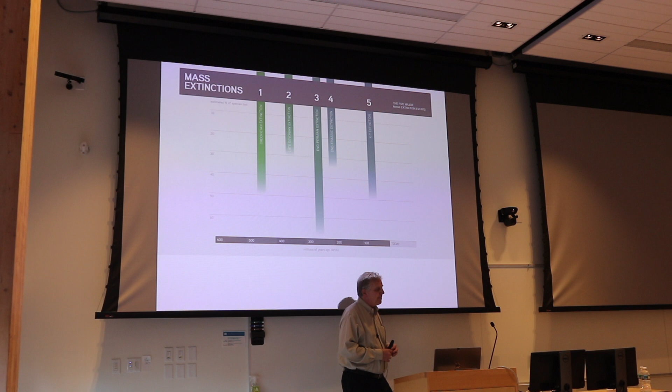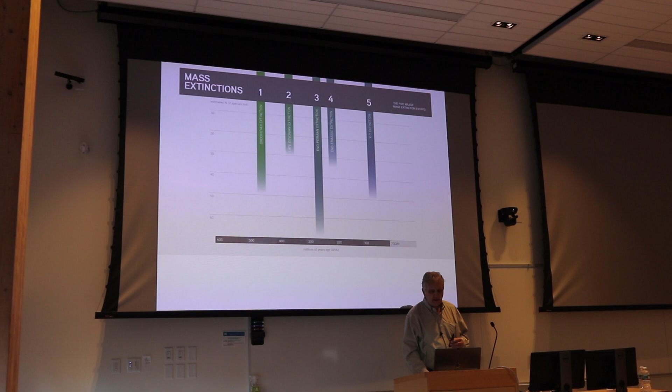You may know there have been 5 major mass extinctions in the past. This number 5 is the one where dinosaurs were theoretically wiped off the earth. But the biggest one was about 250 million years ago, just after Pangea started to break up in Siberia. You can see in this graph that at that time, the rate of extinction was almost 30%—about a third of all species on the planet were just gone because of that. It was closer to 15 to 20% for the dinosaurs, but that's still an astounding number.

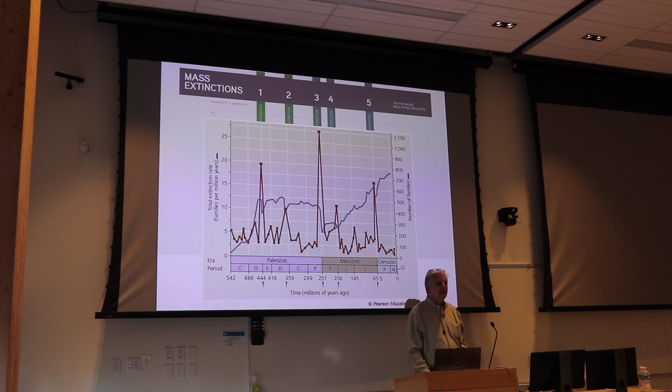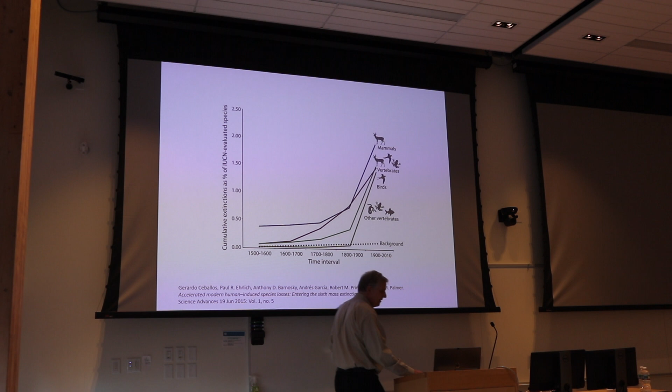So we're comparing to that. This is more recent, and you can see this is a blip on the curve, with the percentage getting close to 2.5%. So we're not up to 25 or 30%, but we are on an upward trajectory in terms of biodiversity loss of species. Part of the reason for that is you can look at this graph of human population—while we've been doing really well, the rest of the planet, species-wise, has been going the other direction.

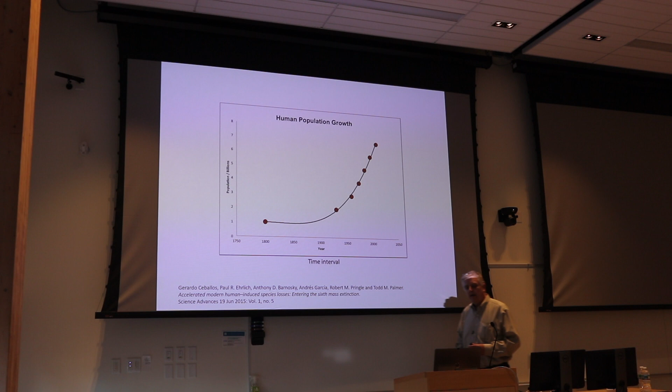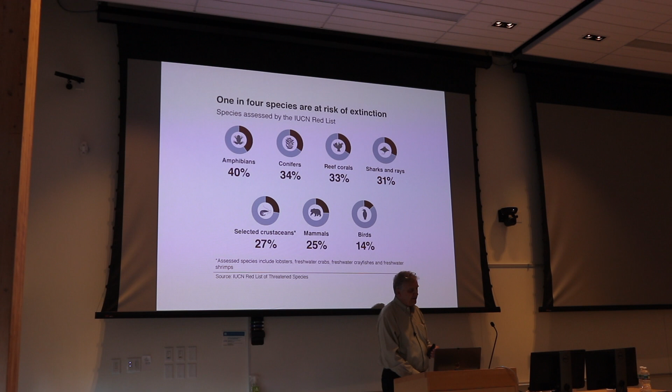They've broken it down into different groups. Amphibians, conifers, reefs, and sharks and rays—30 to 40% are at risk of extinction on the planet right now. Then crustaceans, mammals, and birds to a lesser extent, but still that's alarming to me.

I want to talk about this because you hear a lot about climate change and global warming, and that's important, right? But you don't hear as much about biodiversity loss, and I think we need to be talking more about it. The extinction rates are accelerating—they're going up. It's unprecedented during human times, over the last 300,000 years approximately. They estimate about 1 million species are threatened with extinction right now. This was the most comprehensive assessment of its kind.

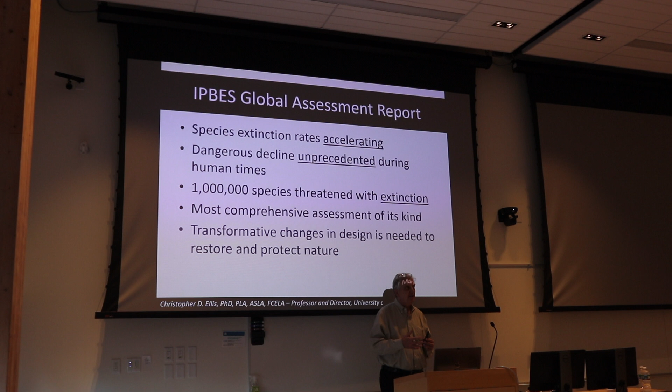So from a landscape architecture standpoint, our conclusion—and we're going to go through this a little bit more—is that we need to change the way, and I know a lot of people are, but we need to continue to change the way we design in order to restore and protect nature.

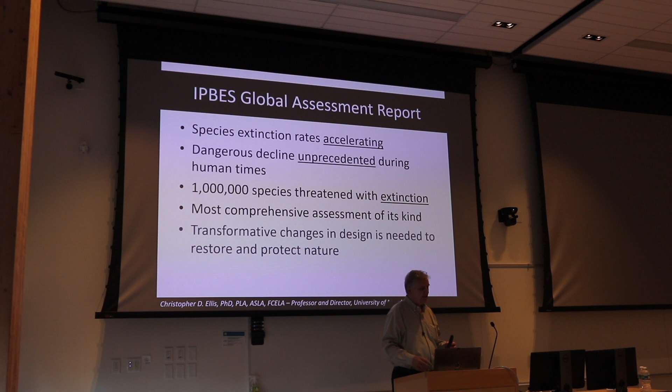So it's really great to look out the window here and see that it's happening next to the school where you guys are studying it, okay? Now if we can just get it on the rest of campus, that would be a great thing. Some more things to look at.

The biggest driver for this, at least for birds, reptiles, and mammals, is habitat degradation, okay? So that's something we can do something about, right? For fish, it's exploitation. We're eating a lot of fish, harvesting the oceans very heavily, but behind that still is the habitat degradation. So to the extent that we're involved with habitat restoration, for those of us who are interested in that kind of thing, it's really important to keep these numbers along with us.

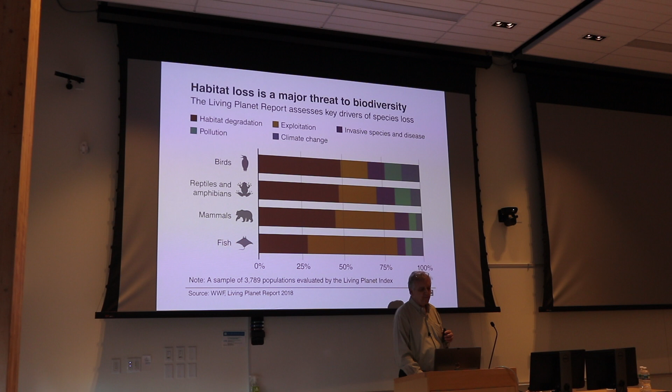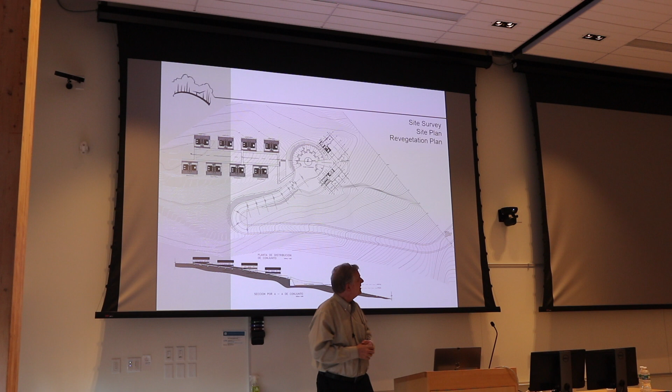So we went out there and did a survey — those contours are all ours. We spent 7 days with a total station going through. If you look close enough in the contours, you can see there was an old farm road that came up this way, and another one we followed that went up that direction. So we ended up wanting to get people quickly up to the top of the ridge, so we designed a switchback.

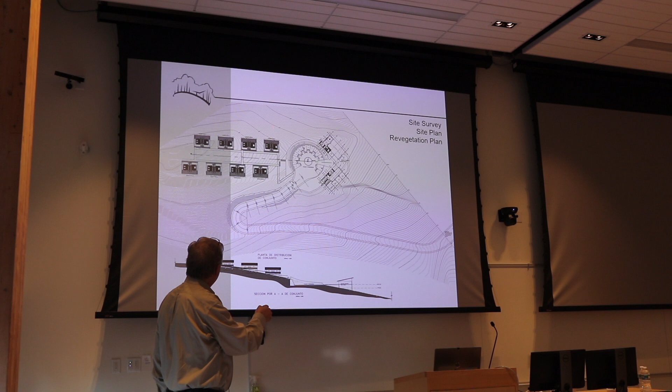And this campus center — this is the academic building, and these are all bungalows. The architect designed the buildings, and we, the landscape architects, put the plan together. We decided this is where we wanted the academic building, and they designed one of these. We decided there should be 8, depending on how many students are going to be down there, and we arranged them into this kind of campus plan.

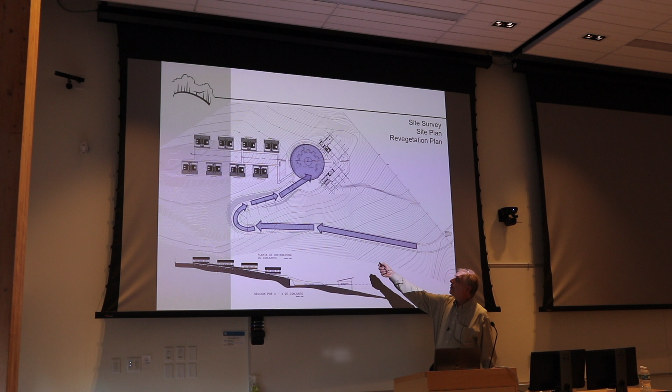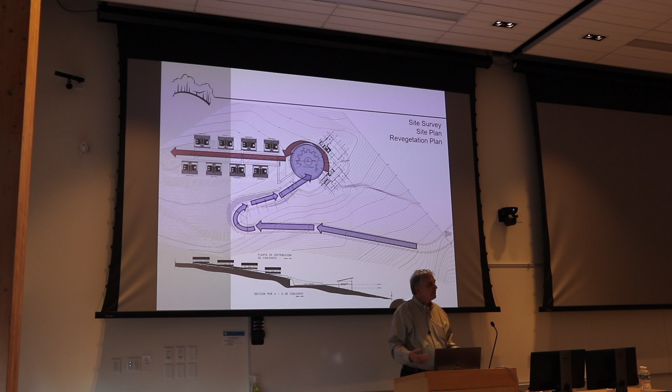You can see that you can drive a car up here — those are all parking spaces measured out along there, and that's the walking path. So the cloud forest is out that direction, 4 million acres right out your back door, and then beautiful views off of this ridge side here.

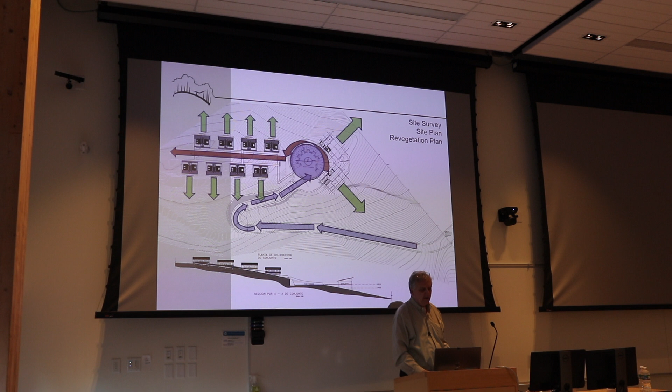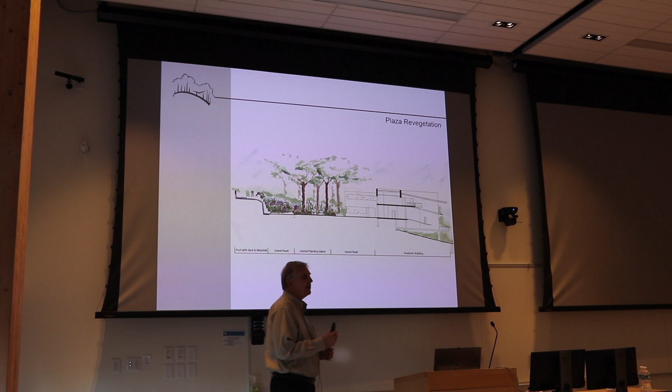You don't get everything you want when you design these things, because the person donating funds said there needs to be a place where you can land a helicopter. Now, why would you want to put a helicopter in a place like this? Anybody? Emergency, yeah—venomous snakes, right? It's like six hours to get to the nearest hospital from this place. It's really, really remote. So that became a helipad instead of a bridge or a reforested area.

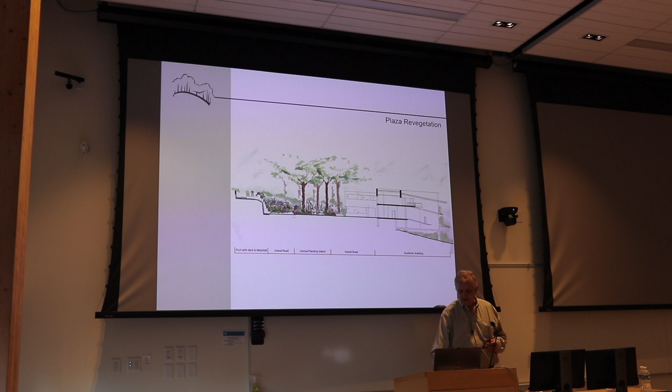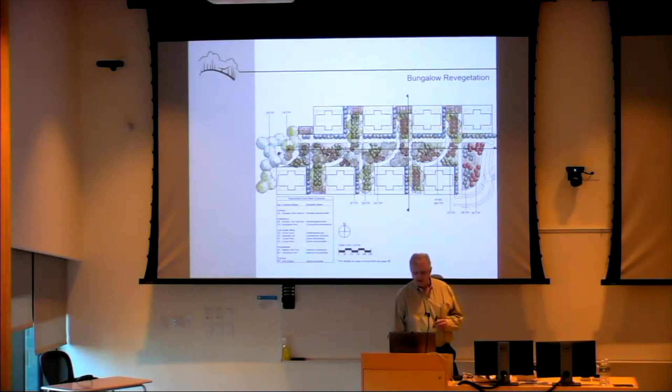But there were lots of other places. This is the design development, so we're reforesting this area of the campus where the bungalows go. And this is what we do, right, as landscape architects. It's a little shocking if you've not done this before, but we dig up the dirt.

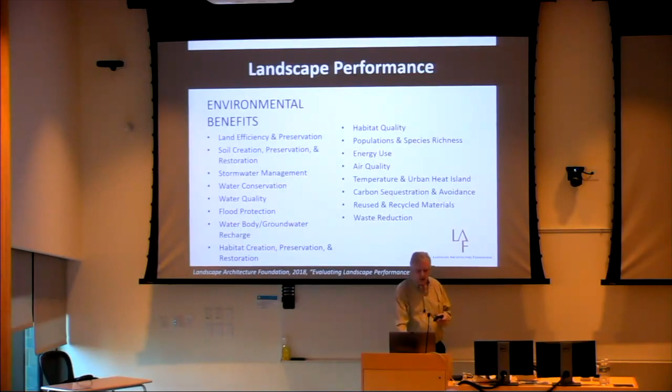So we can measure all that. Social benefits: you can give surveys, ask people how satisfied they are with the place they live, how much walking do they do, are they inspired to go outside. There's all kinds of questions you can ask. Scenic quality, food production, noise mitigation. There's economic benefits, you can measure those as well. And so we do all those things.

The purpose here really is, by quantifying landscape performance, we can articulate the value of excellent design. It's not just to sell ourselves. Really, I think the biggest benefit for us as professionals, designers, or academics is to learn, right? Because if we measure these things, we'll learn from our own work, whether or not we're making a difference, whether the ideas we're espousing are working. So the idea is to provide reliable and valid evidence to justify our design decisions.

There are ways to do it by looking at the goals of the project, you can measure what those goals are. You can look at regulations and say, well, have I met them? Have I exceeded them? You can draw information from construction documents. You can gather secondary data. There's a lot of public agencies or volunteer groups that collect data, the Christmas bird count, right, as an example.

There's records that your client might keep. So we did something with Loyola University in Chicago, and people visiting their campus just to take a tour to learn some of the sustainable things they've done, the numbers went up. So how many people were they reaching educationally to learn more about sustainability?

There are decision tools, calculators, estimation calculators. You can go out and do your own field measurements—tends to be more expensive, but that's something we do. And then combining these methods together. You want to compare them to benchmarks or standards, or in some cases, comparing one site with another. I'm going to show you an example of that.

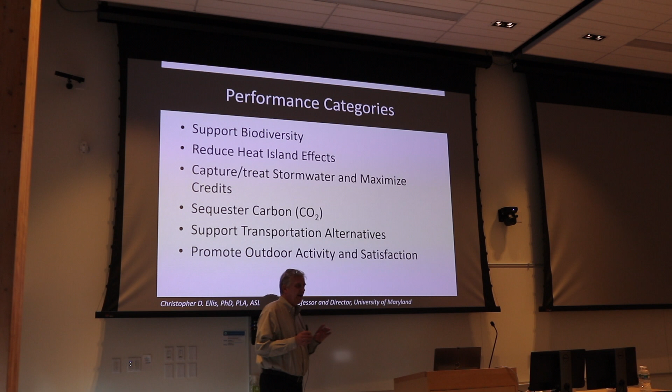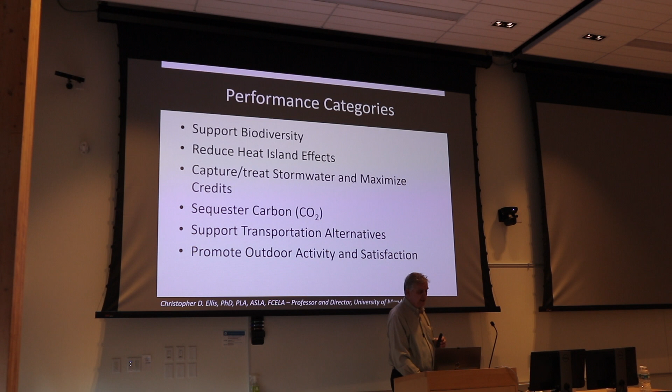When we were there, we studied a bunch of different things, but I'm going to focus on biodiversity. We also looked at heat island effects—that was my most enjoyable part of this project, and I'd love to talk with you about how to do that. There's treatment and capture of stormwater, sequestering carbon, transportation alternatives, and the promotion of outdoor activity and satisfaction among the workers on the campus.

Yeah, exactly. This is the way we've done things for years: build a high-rise, make a big parking lot, everybody comes to work, works in the building, maybe has a nice view. But this was an alternative way to do it, and it's really different. For GSA to say 'we're going to build this instead of that' is a huge leap, and the GSA is probably the biggest owner of property in the United States, and they do this everywhere, so it's making an impact for them to be doing that.

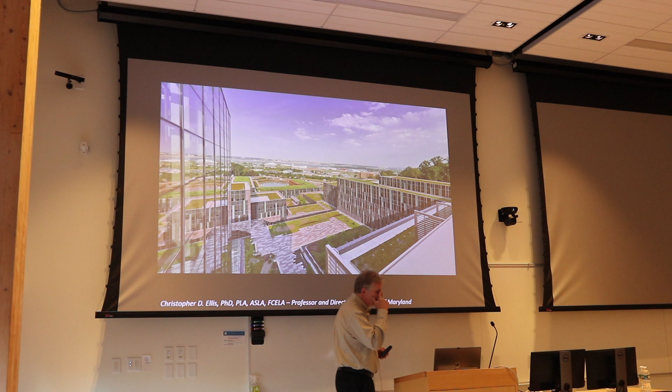For some reason 4 million keeps coming up a lot today, but this is 4 million square feet of building, office space. And you can see how it was designed. Now this last picture is probably the one you've seen the most on LAM, the Landscape Architecture magazine, but it doesn't show, I think, the biodiversity effort that was put into this.

So here we have a list of plants. It's not all the plants, but it's got all the trees and the quantities. I'm glad that Cercis canadensis was the winner of the tree category because it's my favorite tree. And these were all only plants with 1,000 or more in quantity included.

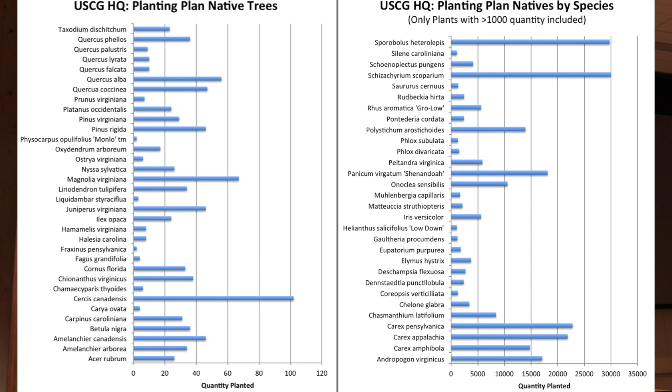This place is massive. You can see these different grasses and so on - if you look down the plant list here, that's 30,000. 30,000. Can you imagine trying to source those? That's a lot of plants. So it took years to line up the plants to put in this place.

It's just huge. There are 800% more native trees than the traditional design would have, and 700% more native woody plants, 12 distinct species. Now this last bullet point was all from our survey - we asked people what kind of wildlife they found out there. They saw turkeys, eagles that are constantly going past these windows, foxes, groundhogs, skinks, insects.

The deer - there are some places it's actually easy to get on, you could actually hop on. I mean, if the police would let you - it's a highly secured facility, they had to walk me, I had to have an escort everywhere I went. But the deer don't have to have an escort, and they've jumped up on the roof because there's something up there they really like.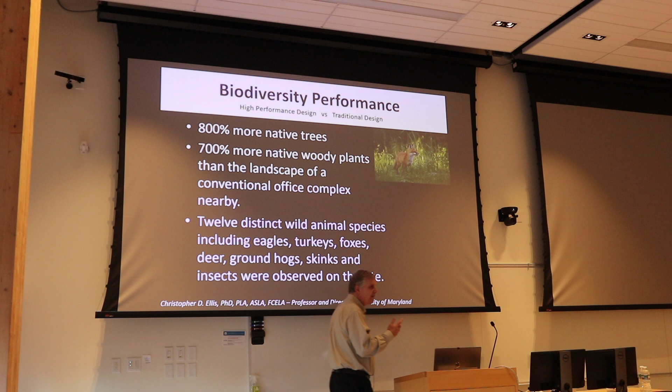So interesting, all right. So I'm going to ask you the same question: is this successful for biodiversity or not? How many people say yes, this one is successful? All right, good. All right, thank you. All right, I've tricked you once, and now I've tricked you again.

So what about 10 years from now? From a landscape performance standpoint, it's always been about going out there a few years after the project's done, when it's in the perfect condition - it's probably never going to be better than this. And we do our measurements and say, hooray, we did a great job. Then 10 years later, it's not quite as good as it used to be, right? So this is my critique of what I've been involved with for the last 10 years.

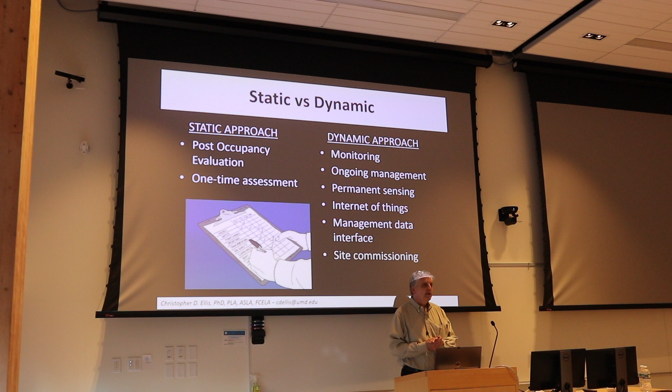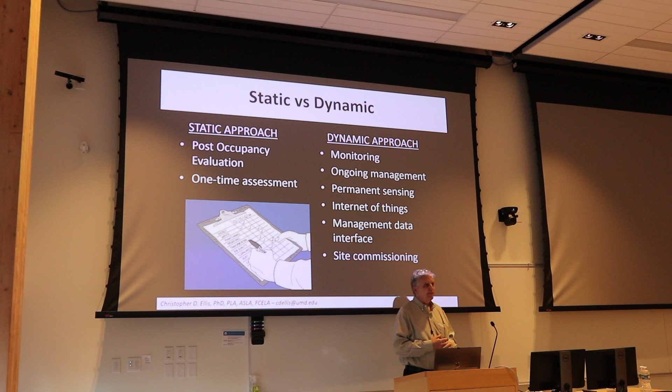We need to go beyond this. So really the question is, do we go with this static approach, this post-occupancy evaluation, or do we take it farther? To take it farther, we need to get into something more dynamic. We need to think about monitoring, so things are constantly being measured. Ongoing management - we need to get into that. Permanent sensing, sensors - technology is expanding in so many different ways and the prices are coming down. Permanent sensing, Internet of Things, if you know what that is, tapping into that. Management of data and interfaces are things we'll need to produce, and something called site commissioning - there's a white paper on that which the GSA put together, because they're doing it.

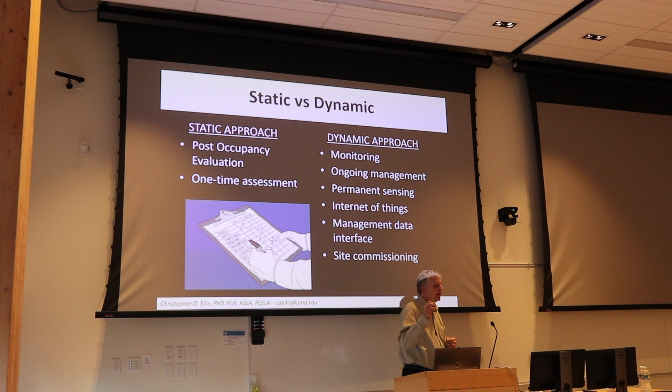It's really taking into account the idea of monitoring from the day you have a conception, going through all the planning and so on. So I'll talk about that in a minute. So how do you do monitoring? You need to come up with models of how to measure some kind of a landscape, whatever it is.

In-stream, they even have multi-sensors, so you know temperature, pH, conductivity, flow rates, total nitrogen, phosphorus, suspended solids, and so on.

You can measure things with bioacoustics. Has anybody heard of bioacoustics before? A couple, good. Basically you're just listening to wildlife or city life, and there's been work to help define what you're hearing. When I was doing remote sensing, we were doing supervised or unsupervised classifications—you can do that with aerial photos, but you can do the same thing with sound. To know not just if you're listening to a frog, but what frog species it is, or what bat species it is that you can't hear but it can hear, and so on.

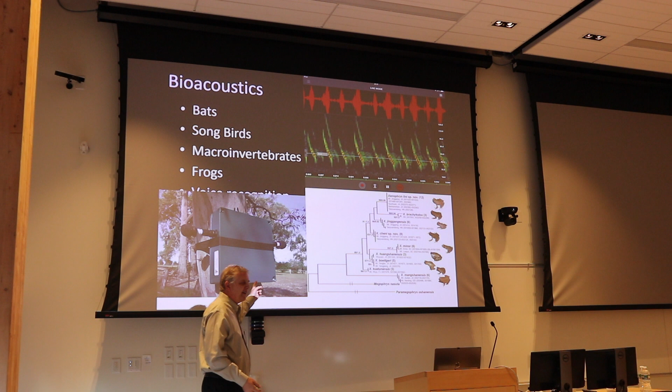And this is what they look like—they're small, they're lightweight, you can just strap them to a tree. I would do this in a wetland somewhere, but I wouldn't do it inside the Beltway of Washington, D.C., because it probably won't be there when you come back.

Camera traps, right? So we don't actually trap the animals anymore, we take pictures of them. It's a great way of getting information.

I don't know how many of you have cheated on your quizzes—you'd never do that, would you? But these things can help you identify the plants, and if you allow them, they will geocode and know where the plants are, where you can find them. That helps build a database to know where these things are.

UAVs—so some of us have some enthusiasts, right? I live and work so close to Washington, D.C., it's almost impossible to fly a drone. 30 miles outside of Washington, D.C. is a no-fly zone for drones. So I can do it in Baltimore, but I can't do it in D.C.

Anyway, all kinds of things you can gather with drones these days. It's amazing what you can mount on one of these things to monitor long-term ecological systems, invasive species, disturbance, ecosystem structure, and so on.

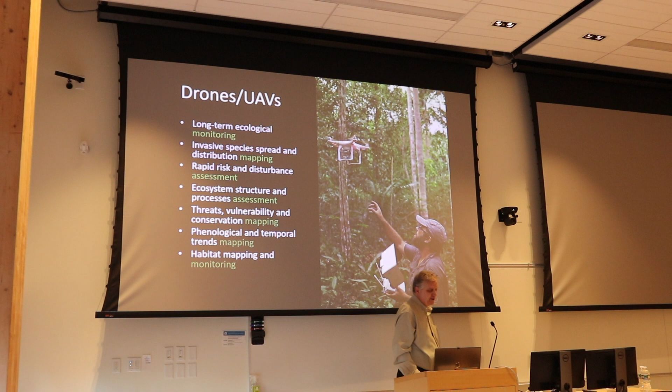Phenological and temporal—how many people know what phenological means? All right, well, it's an important term, because as we have climate change, we have plants migrating from place to place, things moving around. More of that is going to be part of something you need to think about: what plants am I going to plant now? Because 50 years from now, the conditions may be different. So get to know the phenological word, because you're going to hear it more and more.

So monitoring—you can monitor plants, macroinvertebrates, fish, insects, birds, all of these things from a biodiversity standpoint. And in your options: acoustic monitoring, camera traps, annual reporting.

I put some pictures up there at the top about tagging, right? So we know we can tag, but when I was going and looking at the breadth of what we can tag and monitor, it was amazing for me that you could actually tag a butterfly, or a tortoise, or a fish, and so on. So that's why I say the sensors are getting more amazing.

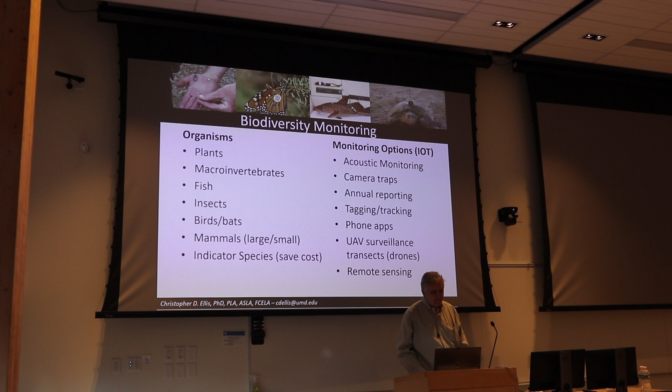And in the end, you're going to be collecting more data—it's such a data-rich environment. How do you make sense of it? So you need to start thinking about what data needs to be on your dashboard, how many dashboards you need, and what kind of decisions you need to make. How do you need to be informed? So it's not just the data, it's how can you turn that into usable, actionable information. And I told you I was going to say what site commissioning is.

It's really benchmarking during the pre-development planning. You need to target the measurement opportunities during design. And then at the end, you need to implement basically during construction and verify during site management. So it's really all phases from concept to management at the end that you should be talking about as you go through these projects. The benefits can be cost savings, a net positive return on investment, lower liability claims, and so on.

I'm almost at the end, so if you have a dinner date, please bear with me for another second. So site commissioning is really where that's going to happen. And so, in conclusion...

These are not earth-shattering points. Biodiversity is critical to the well-being of human beings. Design, planning, and public policy must support biodiversity. Some of it's coming out under Obama's biodiversity policies, especially for pollinators. And you have to quantify it. This is really my bottom line when it comes to the future of landscape performance: it's only through monitoring that we can adequately document landscape performance. It can't just be this one-shot deal.

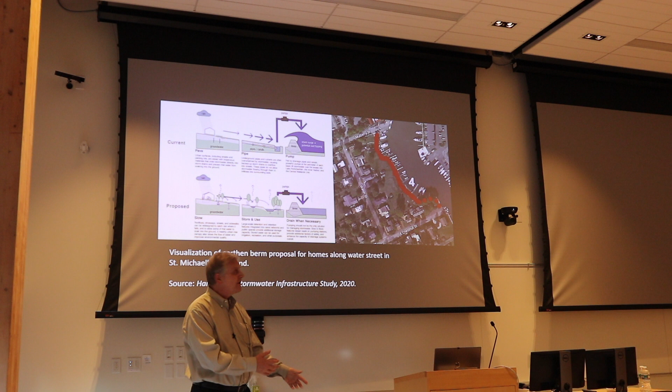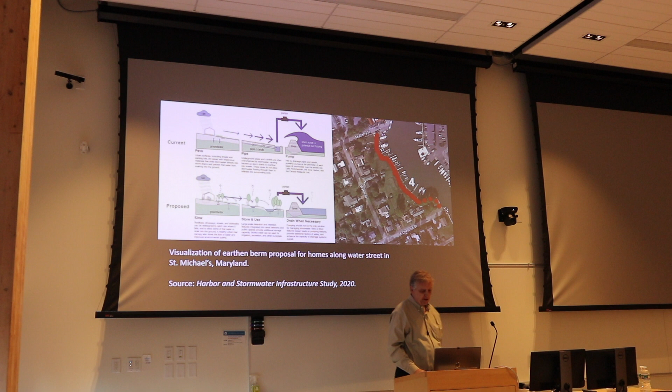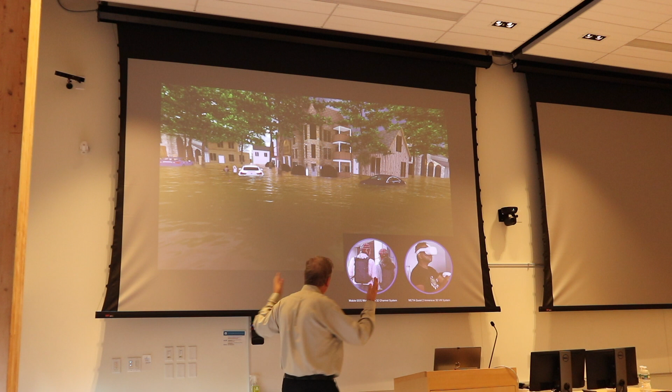And then we've got some sections which, maybe as designers, we might understand, but most people haven't got a clue. So what I've been doing is trying to simulate flooding. This is a flooding image, it's a little dark, but I've got them in here. What you're looking at is a 2-dimensional projected image of a 3-dimensional 360 surround — this is Lumion, just Lumion. You can build this model of the town, and all you have to do is put a simple plane in SketchUp, call it water, bring it into Lumion, and you've got yourself a flood. I showed this to somebody who'd been in a flood like this, and they said the water's way too clean. So I spent a lot of time making that brownish color on there, so it looked more like a flood.

So if you're interested, I have these things loaded on here, and I also have some student models if you want to see these things. It may take a while if you all want to see it. I am supposed to visit some studios tomorrow, but I'm happy to show you what I have in here. And that's all I have, so thank you very much.